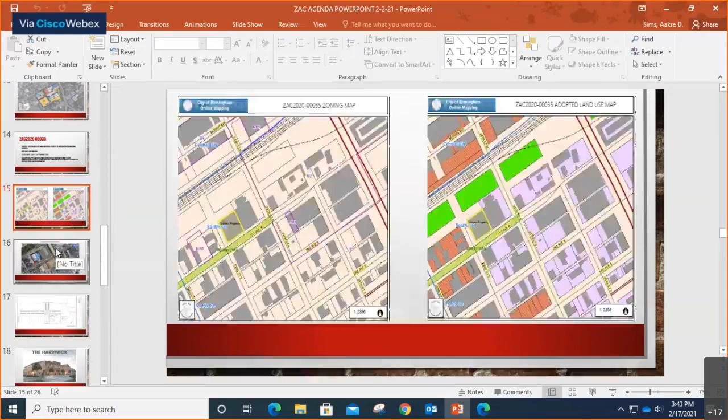The proposed use is to allow office, retail, and restaurant use for this project. The city's long-range land use identifies the property as light industrial. The proposed rezoning request is consistent with the long-range land use plan. The neighborhood's recommendation: the 5 Points South Neighborhood Association held a special call meeting on January 5th, 2021 to review the proposed project.

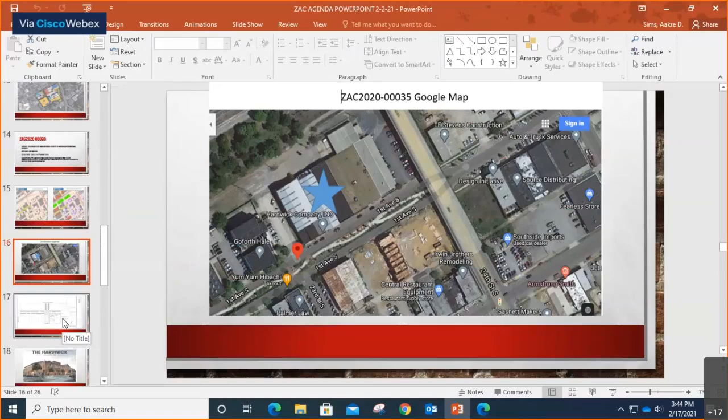They voted to recommend approval for the rezoning request. The vote was 5 approved and 0 denied. The Zoning Advisory Committee met at its regular scheduled meeting on Tuesday, February 16th, 2021 to review the proposed rezoning request, and they voted to approve the proposed rezoning request. So that is the presentation for that applicant.

So is Mr. Eric Morrison on the line? Yes, hi Ms. Sims, I can share my screen if... Sure, if I can get presenter rights, I'll stop sharing, hold on, let me stop sharing. Uh-oh, got it, got it, okay, I think we're good now, okay.

Can everybody see that okay? Yes we can, yes, yes we can. Okay good, thank you, yes.

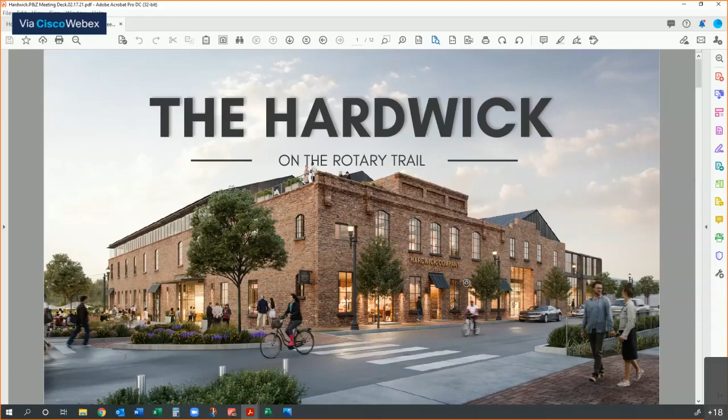Great, good afternoon councilors. I believe Ms. Abbott and Mr. Hilliard have both seen this package before, so please allow me to just run through it as a refresher. My name is Eric Morrison, I'm with Bayer Properties, representing the applicant on this project called the Hardwick. It's located on 23rd Street and 1st Avenue South, fronts directly onto Rotary Trail.

This is a historic redevelopment project, adaptive reuse. This is a 110-year-old building. It is home to the Hardwick Company, or one of its predecessors, since the early 1920s. As you can see, it's a very cool and flexible canvas on which to design a historical renovation project.

This is what the project can ultimately look like. It is a mixed-use project, planning about 41,000 square feet of usable office space and 9,500 square feet of restaurant or retail space, spread out over 3 floors.

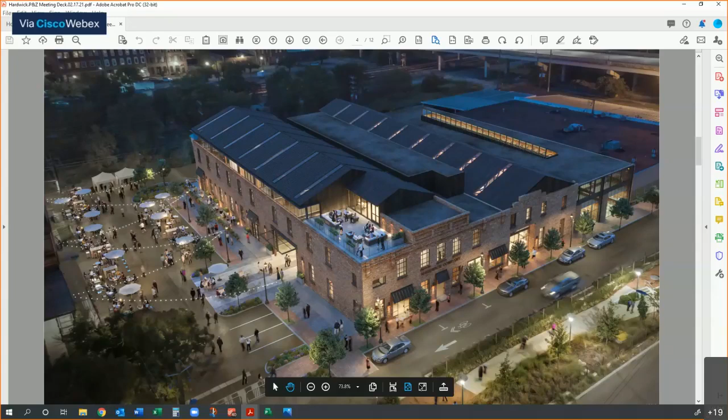It's a pedestrian-friendly design. I'll come back to this in a second, but if you notice here on the screen, there's kind of a large opening on 23rd Street. I'll show you in the next slide what that will look like on the inside and how that makes it pedestrian-friendly. Rotary Trail does come to grade at 23rd Street right here, you can see the bottom of the screen. We kind of look at this as the eastern trailhead of Rotary Trail, at least as it currently stands.

I mentioned the pedestrian plaza there. We will be endeavoring to get WELL certification for this project. If you're familiar with LEED certification, which talks to building efficiency, WELL certification is geared towards the building occupants and the health of the environment for the building occupants.

In addition, and sort of related to WELL, we'll also be building in all of the necessary post-COVID features that you'd like to include in a post-COVID development for the health of the occupants, whether that's touchless touch points for access, for doors and elevator call buttons, or bipolar ionization in the HVAC system to filter out pathogens in the air.

We're also going to be looking to utilize PACE financing to finance green features for this project. Those can include solar panels, electric car charging, green walls, and reuse of rainwater. PACE stands for Property Assessed Clean Energy, and it's a state program that is currently on the books with the state.

But no project has taken advantage of it in the 6 or so years that it's been on the books. So we are working with the state right now to try to roll out that program and offer up this project as somewhat of a guinea pig to establish best practices, but also show the state how we can bring important environmental features like this to the forefront and make it a reality.

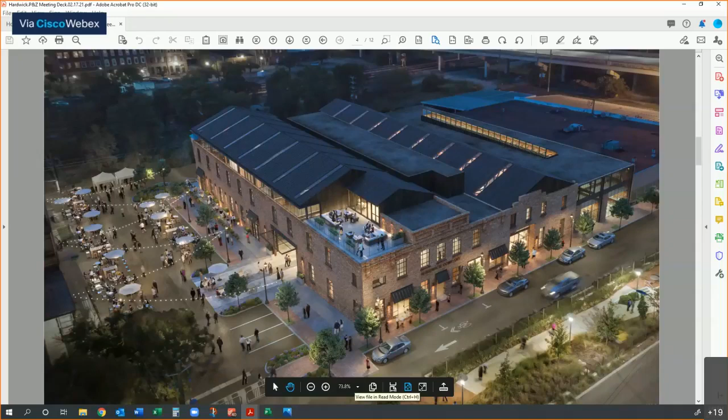This is what I was pointing out a second ago — this is the inside view of that large opening on 23rd Street, and we're calling this the indoor portion of our pedestrian plaza. This does a few things. Number one, this slide showcases the scale of the western side of the building and the 3 stories — the ability for us to build 3 stories inside the current shell of the building. And you can see there are 2 stories of office space over ground floor restaurant space.

The central elevator core is right there on the right-hand side of the screen. Gathering areas are sort of in the middle of the screen there. And as you'll see on some future slides and the floor plans, this is really a central congregating point for all 3 entrances to the property — really makes it truly a mixed-use property where all the uses can come together.

This is something we fought very hard to preserve with the Alabama Historical Commission. They tried to tell us that it wasn't historical, but we felt it was a very, very important part of the project for all the reasons I just mentioned, and thankfully we were successful in being able to preserve it.

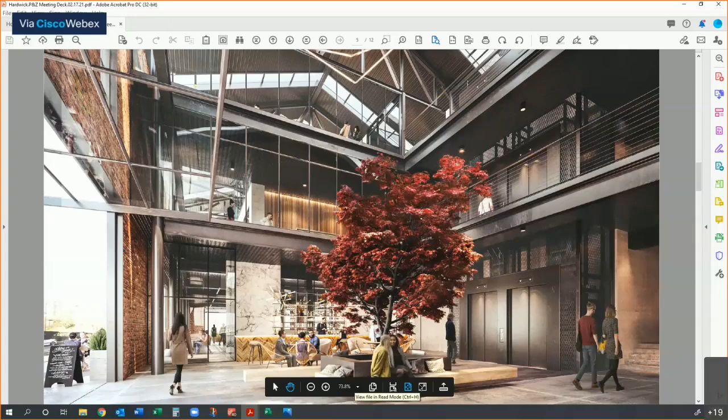Here's a first floor plan, a mixture of basically half and half office and restaurant space. On the left-hand side there are restrooms called out. Those will be common restrooms for all of the restaurant and retail space, similar to how Pepper Place does it. If you've been to a restaurant over there, you'll know what I'm talking about with the common area restrooms for those spaces. It provides efficiency and also provides a way for patrons to mix and mingle.

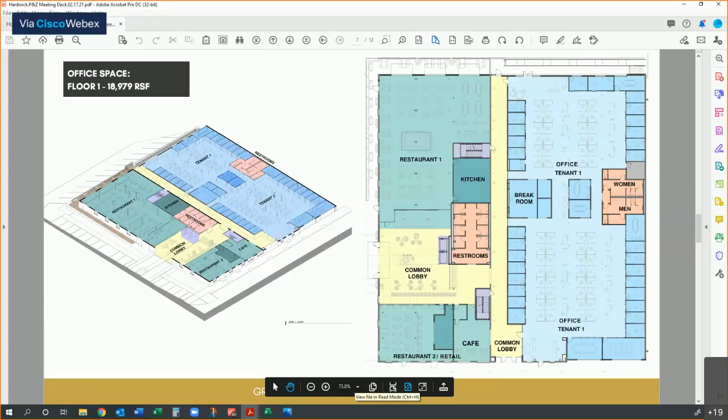So once again, this leads to the true mixed use nature of the project. You're not cordoned off into your own space all the time.

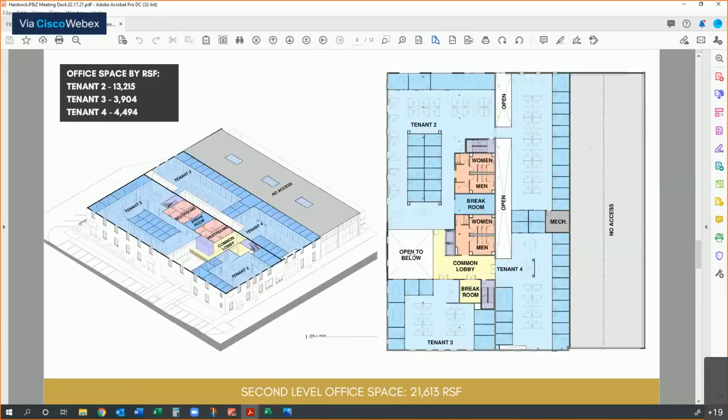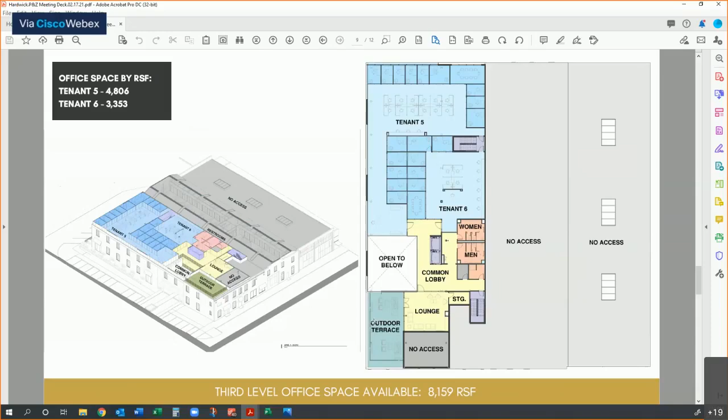Then the third floor, once again all office space, with plenty of natural light coming in from above and from the sides, and a light well coming out from that indoor plaza. We also plan to have an outdoor terrace on the southwest corner of the property on the third floor, which will overlook Rotary Trail and have great views of the city. We think it's a pretty cool and important feature for the tenants of the property.

Those are all my slides. I'm happy to answer any questions that you may have.

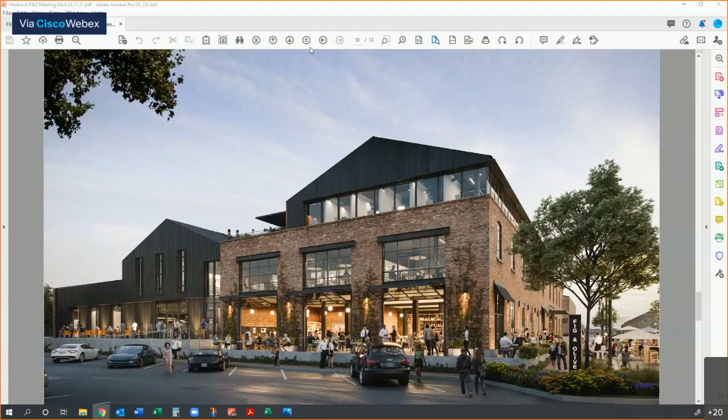Okay, do you have that aerial view that you showed us a few weeks ago that shows the current conditions? Sure, or I can just pull up a Google Map aerial view. Does that work? Oh yeah, Google Map is fine.

So here's Powell Avenue, 23rd Street. So the 23rd Street space right now is what? So it's paved concrete, and there's parking on it. It's sort of informal parking, so to speak. It's not striped particularly well, and it's certainly not efficient.

Okay, and is it going to be owned by you? No, ma'am, that is city right-of-way, and our plan is for that to remain city right-of-way. Okay, so no one's going to ask for a vacation of that street, so it will still be a through street. Correct, this portion of 23rd Street, yep.

Okay, because in your picture you showed a bunch of tables and chairs out in it, as if a person could not drive through. Yeah, sorry, that might be misleading. The rendering artist took some liberties, and we were okay with it because it showed what ultimately would be possible in a post-COVID world, or if we get another pandemic where you need a lot of outdoor seating. Of course, you'd have to get a permit from the city. We left it in as a marketing piece to show the ultimate potential if you needed it. Well, kind of like Pepper Place, I guess. Yeah, if you want to have a block party, something like that.

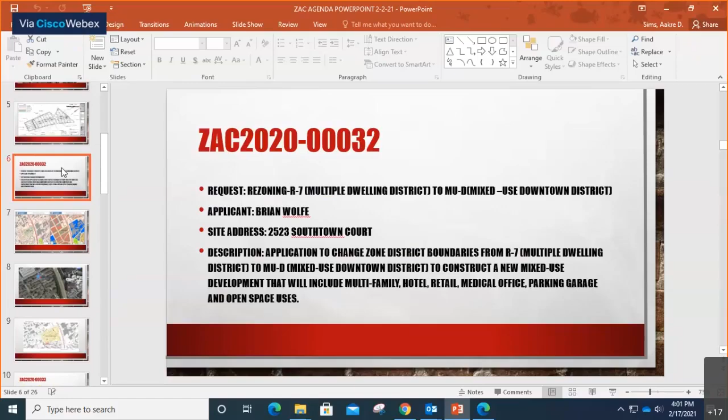The next case will be ZAC 2020-00033, also in the Southtown neighborhood. Application to change zone district boundaries from B1, neighborhood business district, to MUD, mixed use downtown district. This is filed by Stephen Hollinger, representing the owner, Bell South Telecommunications, LLC, for the property located at 911 23rd Street South.

The next one is ZAC 2021-0006, also in the Southtown neighborhood. Application to change zone district boundaries from B1 neighborhood business district to mixed use downtown. This is also filed by Stephen Hollinger, representing the owner, Ken Webster, for the property located at 959 23rd Street South.

Okay, and the proposed uses for those three are a mixed-use development that would include affordable housing, multifamily, hotel, office, retail, medical office, parking garage, and open spaces.

The Five Points South Neighborhood Association held a special call meeting on January 6, 2021, and voted to approve the proposed rezoning request. The vote was 5 approved and 0 denied.

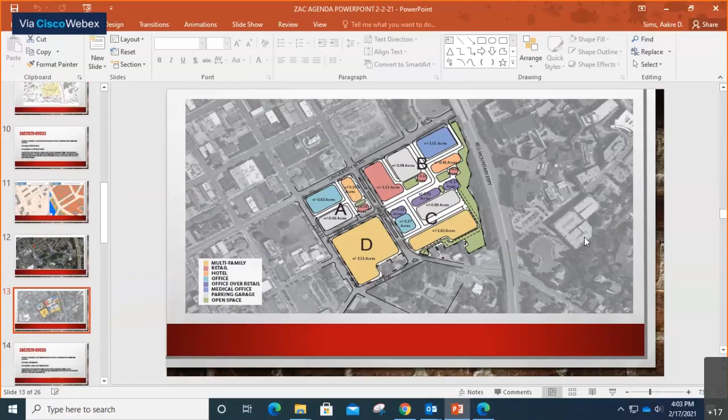Good afternoon, Councilors Abbott and Hilliard, city staff, and members of the public. I will just make some introductory remarks and hand it over to my colleague, Becky Carpenter, who will get a little more into the land use plan that we're proposing.

So I'm Carol Clark. I serve as general manager of Southside Development Company, and we were selected to be the developer partner for the Housing Authority for the redevelopment of Southtown Court.

SDC, which is what we nicknamed it, has 3 members. One is Corporate Realty. One is the Benoit Group, which is an African-American owned company. So I like that it's 1/3 African-American owned, so I'm just bragging. But then the 3rd member is BREC/SPM.

And Stephen Heidinger, who tried to join the call, is the representative from BREC, but he had technology issues, so he won't be joining us today.

But all of these companies have very deep experience in the mixture of uses that Aakre described in the zoning application, as well as property management of all of these uses.

Representing the owner today, Housing Authority of the Birmingham District, we have Christy Hilliard on the line, and she is with the Real Estate Department of HABD.

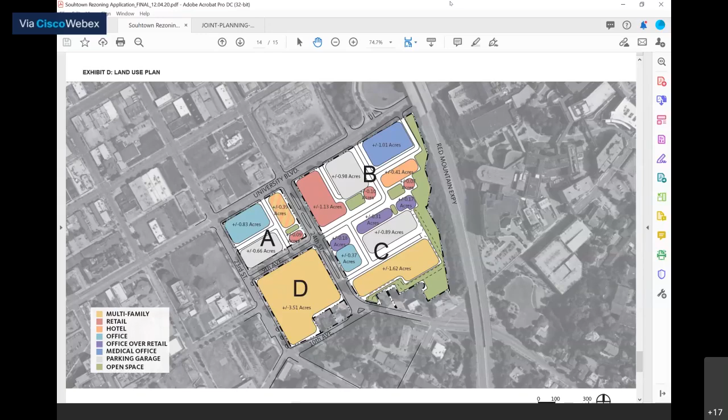Yes. Okay, so this is what we were speaking to earlier. It's a true mixed-use site with replacement housing, hotel, office, additional residential, and pocket parks and green space throughout. We are maintaining 24th as a thoroughfare from the over-the-mountain communities into Birmingham, but we are also working on some transit-oriented development and traffic calming measures, introducing bike lanes and wider sidewalks. So this will truly be a multimodal development. We've also explored adding a bus stop to this area. So we think this mixed use will be well served, given its frontage on University Boulevard and with Red Mountain Expressway to the east. I'm happy to answer any questions anyone might have.

Go through and explain what is planned for each one of the parcels or designated areas shown on the map? Yes, ma'am.

I'll start with Block A, which will actually be the last block to be developed. It will be maintained in its current configuration for a time. The residents will continue to live here on Block A while Block D is being developed. Block D is going to be the first replacement housing brought back to the site, so that will be the first block developed. Until Block D is open and residents can move into the buildings there, Block A will stay as the housing that's there currently.

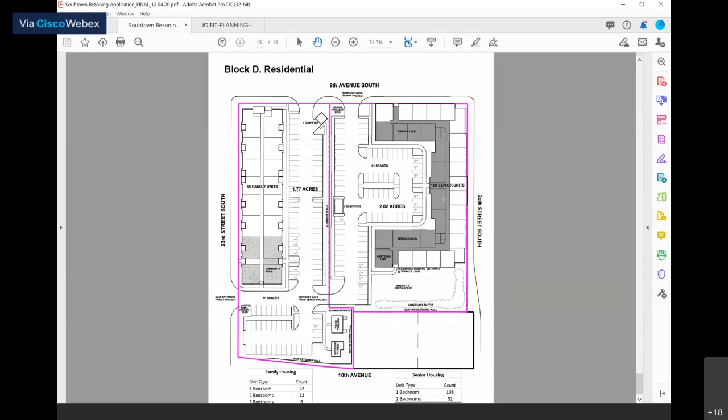And can you tell us how many residences will be built back on the Southtown property? Currently Block D has 60 family units and 160 senior units, so there's 220 on Block D. Block C we've not yet designed, so we don't know how many floors or how dense it would be, what configuration, whether it would be mostly 1 and 2 bedrooms or more 3 bedrooms. We're not sure yet on a unit count for that building.

And how many residences are in the Southtown development now? Carol, take one, I don't want to misspeak. At the start of relocation, and Christy you can back me up, there were 421 occupied units. It's a total of 455 built units, but not all of them are in service as residences, a couple are offices. So I think the total possible occupancy would have been 451, but we started out with 421 occupied.

Okay, so roughly, you'll be cutting the residences about in half, roughly.

Well, I believe by contract we have to build at least 200 replacement units, but I believe we will do another phase of affordable over on Block C. Whether that'll be mixed in with market or conventional is kind of where we're not sure. So we do plan to do additional family units in Block C in a mixed income setting, but the market is so saturated now, we just have to determine at the time what's feasible, what the mix will be.

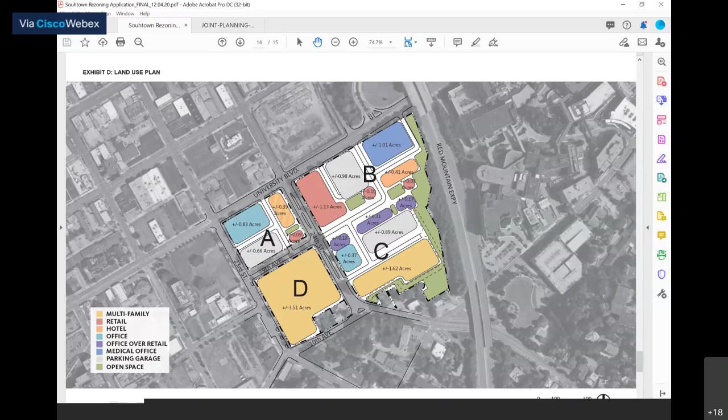Okay, and which one were you saying was nearby? Because the Hilton is blocks down the street on 20th. It's not really nearby. You said you were pointing to something, but we couldn't see your cursor. Oh, right, so yeah, I was referring to the Hilton, which is just down to the left here.

Here's 23rd, 22nd, 21st. So the Hilton's just off the screen to the left. And then I was also referring to St. Vincent's here, where there are the towers.

Oh, okay. But it's down in a hole, isn't it. I guess it's not a hole, it's a dip. I'm not sure what you'd call it, a depression in the topography.

Okay, well, is there anyone else on the call who wishes to speak?

Do we still have Ms. Sanfilippo, or have you dropped off? I'm here, Councilor Abbott. I think you got our point across that we were concerned with the 225-foot height.

We just wanted to make that point. Our zoning committee looked at it, and that was the overarching concern, and we felt like 100 feet would be more appropriate.

We also realized it's not in our neighborhood, so we just wanted to share that input. Thank you. Okay, thank you.

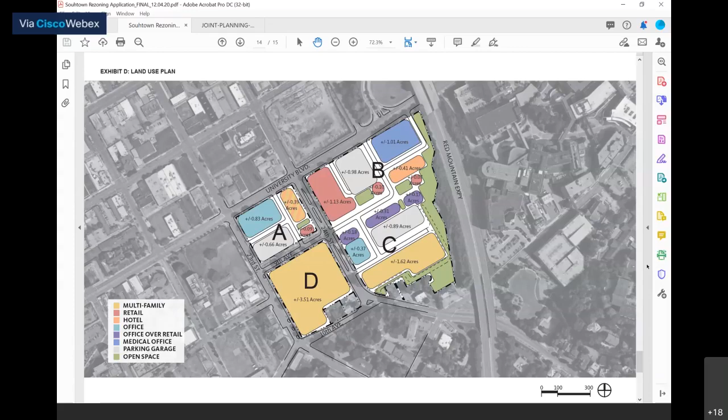So that being said, anyone else who would like to speak regarding this issue, or do you, the representatives of the developer, have any comments? Councilor, I just want to say a few words if I might. Okay, where are you? This is Tim Brown. Hey, Tim. I think what Becky was saying earlier is that...

The possibility of those tall buildings is on 8th Avenue. I may be wrong, but the way we were looking at that area in the land use plan going forward in the rezoning of downtown is the automotive district has got a lot of potential to change. A lot of low-slung buildings, many of those buildings don't have a whole lot of character. Some of them do, but for the most part, within a couple of avenues, 2 or 3 avenues of there.

That whole area there we see as a big transition area. So from this point, say midpoint, or maybe 1 block south of 8th Avenue, and then going back 3 or 4 blocks north of 8th Avenue, we see that kind of as an area that's ripe for a lot of change in the future, and probably some taller buildings. Not necessarily 225 feet, but what I think we intend to rezone most of that to is a district that would allow for 125 feet, and then you would have some height bonuses for affordable housing and for activation of the street level. And so, partly that's where we came up with 225.